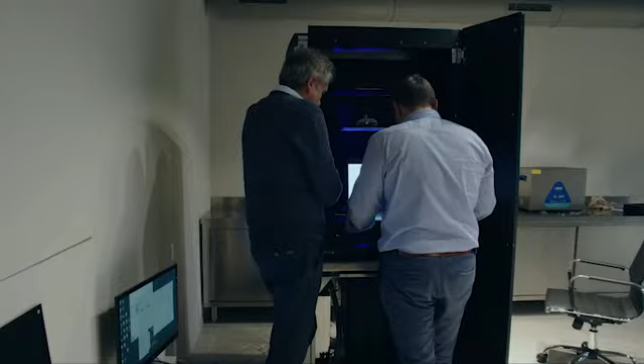It's about our company, Axtra3D, and our breakthrough technologies and products that are set to revolutionize 3D printing. A few highlights: Axtra3D has a portfolio of 9 key patents and growing. We are a cohesive team of proven AM industry experts who have been working together for the past several years, boasting a combined 50 years of AM industry experience. Axtra3D operates from 2 strategic locations, USA and Italy, with headquarters in USA.

While our predecessors made several exponential technology leaps addressing some of the drawbacks of photopolymer 3D printing, the trade-offs between part quality, resolution, print speed, scalability, and accuracy still remain. These trade-offs meant when you optimized some, you had to give up on the others. For the first time, our technologies, highlighted by our hybrid photosynthesis, eliminate the need for trade-offs and optimize all the key competencies independently and simultaneously. As a result, Axtra3D is poised to make a giant leap that will enable far wider adoption of photopolymer-based additive manufacturing.

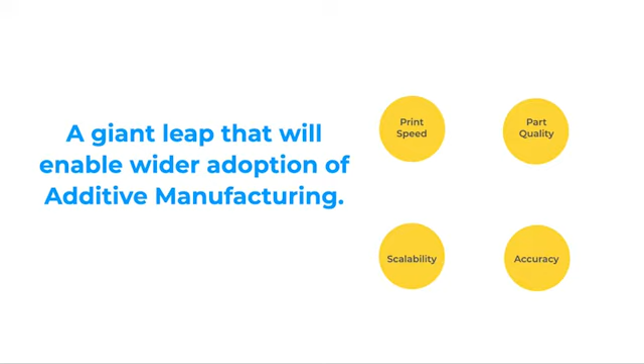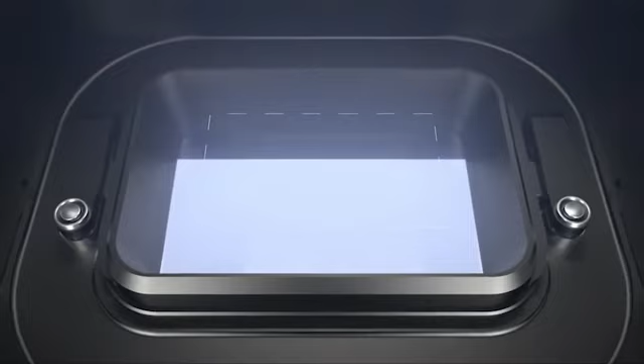Our HPS is a hybrid light engine solution that offers the combined advantages of 2 light engines, DLP and laser. HPS brilliantly brings together the energy from the 2 light sources and creates a harmonized light engine that unifies every value: wavelength, power, curing time, and simultaneous operation.

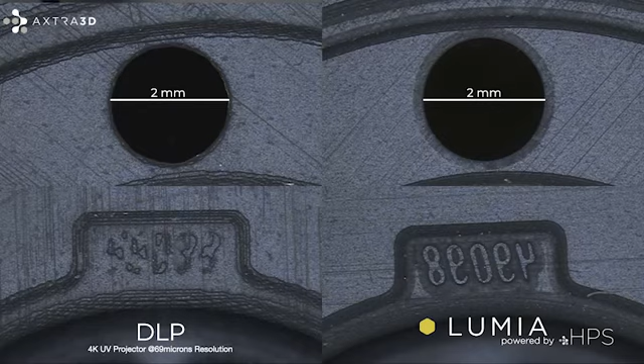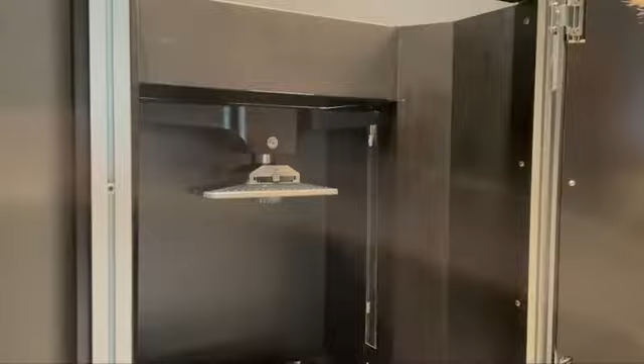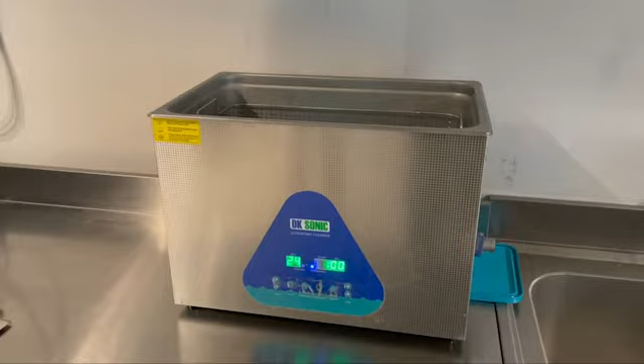HPS enables ultra-speed 3D printing at scale while delivering up to 3 times the resolution, Class A surface finish, high precision, and accuracy. Some of our customers spend 30% of their time and resources on smoothening the surfaces of AM parts. As you can see in this video, our HPS technology offers Class A injection molding-like surface finish straight out of the printer. As a result, it eliminates the need for surface finishing processes, which typically are not environment friendly.

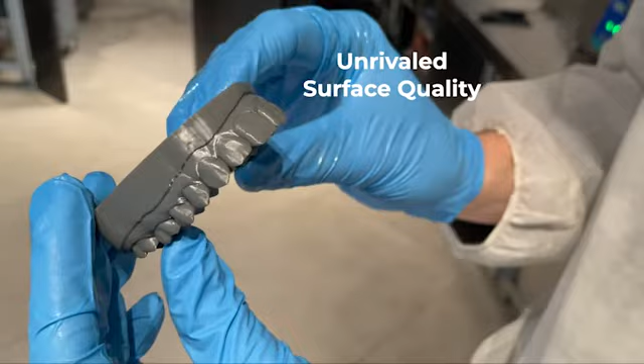What about a marketable product that offers our revolutionary HPS technology? It is already here. Axtra 3D's first product is an industrial 3D printer named Lumia. It offers resolution that is 2 times higher than standard DLP printers while matching the print speed of the fastest photopolymer printers and offering a larger print area. Lumia also delivers high accuracy and Class A surface quality.

But wait, there is more to Lumia. Lumia encompasses other breakthrough technologies from Axtra 3D like zero suction effect during the peeling process, non-degenerative vat membrane, and unlimited cross-section printing capability. Now let's talk about print materials.

All the standard DLP market materials can be printed using Lumia, so there is no need to develop custom materials. Lumia's revolutionary technologies also enable printing of high-performance materials like ultra-high viscosity resins and graphene nanocomposites.

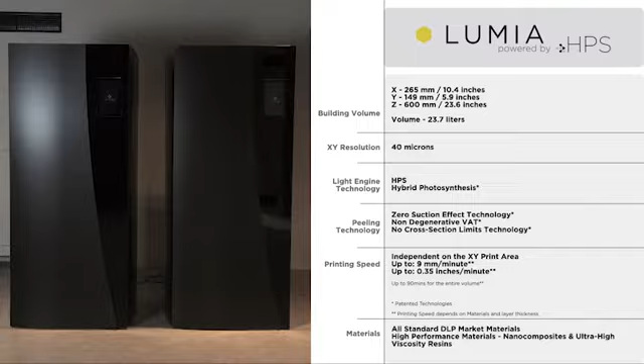We strongly believe in customer validation of any technologies we develop, so we have involved select customers from the very beginning. Our goal was to understand their needs and how the product should be developed to meet their needs, taking into account capabilities, competencies, and user experiences. Our select customers come from various industry verticals, including dental, automotive, aerospace, consumer goods, industrial equipment, pharmaceutical and analytical equipment.

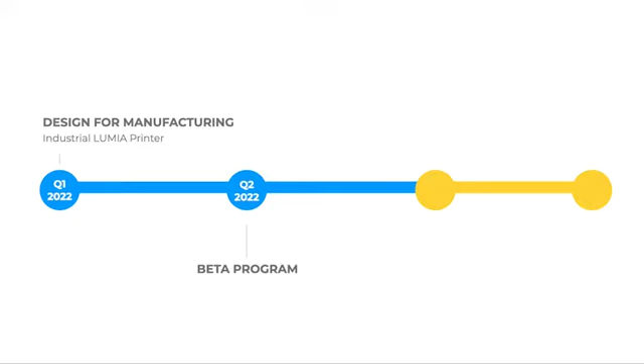We have set all the critical dates. At present, we are closing our design for manufacturing phase. Our comprehensive beta program covering various industry verticals will launch in June 2022, and we will begin taking pre-orders in October 2022. The full commercial launch of Lumia is scheduled for Q1 of 2023.

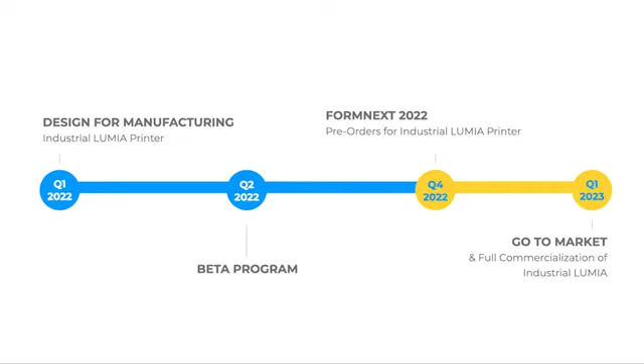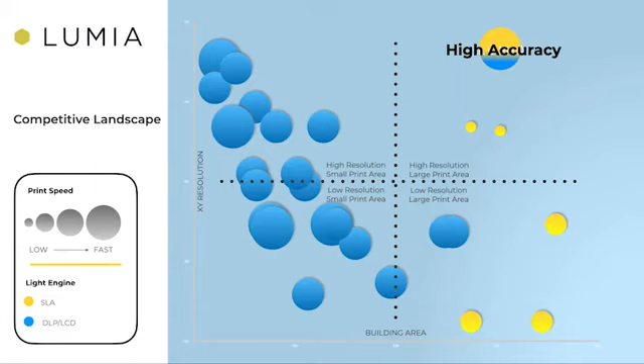So a couple of questions that came to mind. You started the company in the midst of the pandemic. Given your background in the industry for over a decade, what inspired you to come up with Axtra 3D? And building on that, what were some of the opportunities or obstacles you came across, given that you started this in January of 2021?

Thanks Saliq, and thanks everyone for attending. To answer your question, a lot of our predecessors in the DLP and SLA photopolymer industry have addressed a different problem. No one has taken a serious look at the light engine, which seems to be a drawback. With DLP, customers typically achieve speed much faster than SLA. With SLA, we get the part quality and accuracy, which is a problem with DLP. So no one has seriously looked at the two light engines and said, okay, we have these two choices, but there isn't a third choice that offers the best of both.

That's the idea that came to mind in 2020, which evolved into a patent filed in 2020, and in January 2021 led to the launch of Axtra 3D. A lot of difficult work went into bringing this idea to life, because it's never an easy task to combine two light sources. Just combining two lasers is a magnanimous task, and here we're combining a DLP and a laser.

Terrific, Saliq. Thank you, and thanks everyone for participating today. I'm going to go on screen with just a couple of pages here. By way of background, Fast Radius is a cloud manufacturing company. We are building a new type of infrastructure to help companies design, make, and move physical products in the digital world. Our product and platform is the first of its kind cloud manufacturing platform. I'm excited to tell you about that and what we do at Fast Radius, and I look forward to the discussion, Saliq, with you.

The way to think about Fast Radius is we are a software company and we make industrial grade parts. Let's take each of these two in turn. We think of ourselves as a software company. We are powered by software in everything we do in our factories, our supply chain, and in the customer experience. We are building a suite of tools to support our customers across the journey of designing, making, moving, and managing parts. Those tools include design for manufacturability tools, cost analytics tools, and software-driven insights at each stage of the journey.

We also provide a software-driven platform for ordering parts when companies need them made, not just in prototyping but through volume production. When we get into the supply chain side of things, we also have a suite of tools where we can help our customers manage their supply chains on an ongoing basis. An example is a virtual warehouse tool where we help companies like Airbus create a platform, a virtual warehouse, where they can order those parts and have them fulfilled at industrial grade standards when and where they need them. So when we think of cloud manufacturing and us as a software company, we're building out this platform of software-driven tools across the lifecycle of designing, making, moving, and managing parts.

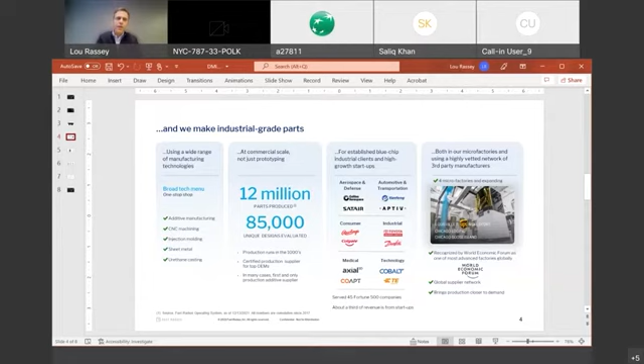When you think about cloud manufacturing, you can think of it in this tech stack, and we have built out this integrated tech stack, much like you have an integrated tech stack for cloud computing. That includes at the bottom the infrastructure of our factories and our supply chain, a learning engine and a digital thread where we can get smarter with every part that we make, a software-driven operating system to orchestrate the flow of work in our factories and our supply chain, then the software and services solutions that sit on top of that—this application ecosystem where we and third parties can build manufacturing services and software tools using the underlying data and infrastructure.

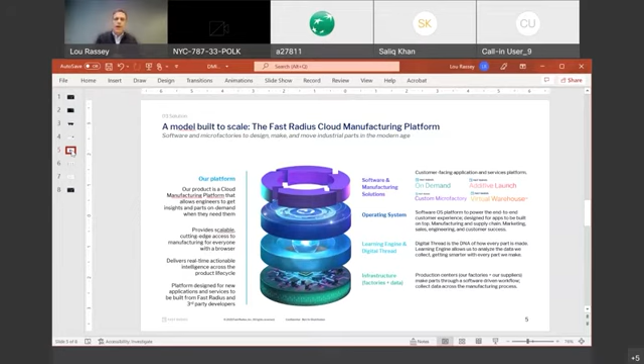As I mentioned before, we have served thousands of customers across just about every industry out there through the life cycle, making industrial grade parts, powering innovation in the physical world. We've been at this now for 5 years. We're excited to have recently entered the public markets through a de-SPAC transaction. We have a great partnership with UPS, including a micro factory on their campus in Louisville.

Our Net Promoter Score is something we're very proud of. The World Economic Forum recognition, I think, gives an indication of the technical sophistication of the cloud platform. But perhaps most importantly, it's the customers that have put their trust in us to make parts at volume for them and with them as they're bringing innovation into the physical world. But in a nutshell, Saliq, that's a little bit about Fast Radius and what we are building.

Excited for the discussion today. Thank you so much, Lou.

Really appreciate it. A couple of basic questions, and I know you and I have kind of talked about this before as well at length, but for the audience: what effectively transpired, or what inspired you—and your team, I should say—to come up with Fast Radius?

Yeah, I think it's rooted in the importance of manufacturing and appreciating the importance of manufacturing. This is an industry that really matters in the world. We say it's not just about the things we make, but the things that we make possible. It's not just about the cars, cell phones, satellites, but it's making the world more connected, making the world more healthy, feeding, empowering the world. This is such an important part of how the world works.

I'm a third-generation manufacturing guy. I grew up in Detroit. I've been around manufacturing since I was a kid, and I have a deep appreciation for the importance of this industry. At the same time, there's this massive wave of new tools, Industry 4.0 and the innovations around it. So I was at McKinsey for a long time, helped build what is now the Industry 4.0 practice, and saw this wave of innovations coming.

New tools of digital design and simulation, new tools in factory equipment and automation, material handling, new models for supply chains. And so it presents this incredible opportunity to create a new platform for how we can design, make, and move things. Given the significance and the importance of the industry, the size of the industry, the wave of innovations coming, it became very clear there was an opportunity to create a new type of platform.

And we've seen this in other times in the industrial revolutions and generations before. We've also seen it in cloud computing. If you look at the impact of cloud computing as a platform that others can build on, it's driven incredible innovation in the digital world. And we think bringing the digital world and the physical world together in cloud manufacturing creates that same type of market opportunity. So those were some of the forces as we thought of putting the company together.

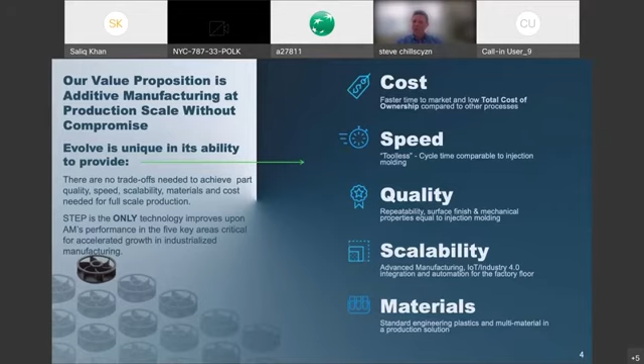And the value proposition that we offer is really about additive manufacturing at production scale. And the big kicker here is without compromise. So we talk a lot about costs and speeds and quality and scalability and materials, and how important that is for our manufacturing customers and application developers. And really the one element we talk about is they're not willing or able to compromise. So again, the STEP technology was created for that alone.

Now, the partnerships that we've put together - putting together a system like this in production is not simple, and it can't be done alone. So putting together the strategic partners that we have, whether it be Materialise or Kodak or Post-Process or Rockwell or B&R, was absolutely essential. Because while the STEP technology is critical to our overall process, one of the things that's very important, and probably more important, is the automation of that process. There was a discussion earlier about repeatability, software, production capability, and that's what automation gives you above and beyond the STEP technology.

Now, from an investment perspective, obviously being a younger company and capital equipment company, investors are critical. So we have investors like Lego, Stanley Black & Decker, and 3D Ventures, which we just closed a round with in the July timeframe. They're actually critical, not just from a capital perspective, but also from the understanding of the market - you get a company like Lego or a company like Stanley Black & Decker that are using plastics in the volume they're using it in a very automated way, and wanting to integrate our solutions into their factories, giving us that knowledge and know-how and that voice of customer that's so critical as you launch a company. So it's very exciting to have these groups, not just as customers, but as investors.

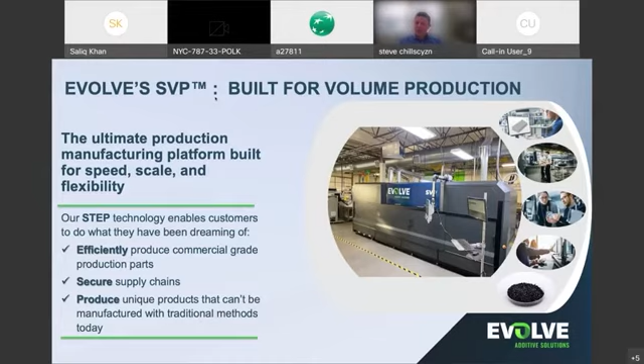And the SVP platform, as I said before, is really built for production from day one. As you can see in the picture here and all of the companion products, this is not a desktop machine by any means. It's built for your factory. The software is built for factory integration, and it's also built for speed and for productivity. So from the efficiency that you're going to get out of commercial grade production parts out of our system is in the materials - that, again, I said materials. And here's why it's so important.

I've said it a couple times, probably ad nauseum, but it's really important: materials. In order to get these applications developed, our customers in production aren't willing to bend and yield into similar or like materials. They don't want to hear it's ABS-like, they want to hear it's ABS, a SABIC ABS or one of the other manufacturers. Same with nylon, they don't want to hear it's this grade of nylon that no one uses. The automotive companies, we know what they want: PA6 with glass fill. So that's what we offer, a PA6 type of material.

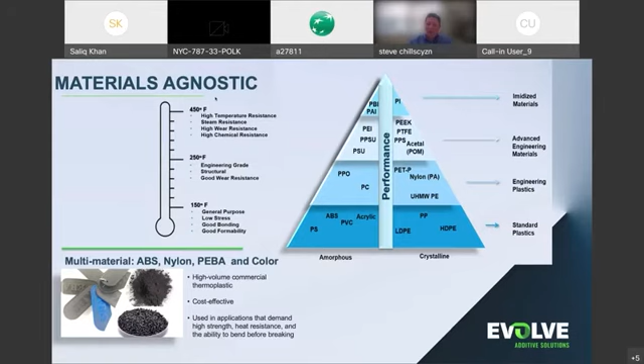Lots of different opportunities, because STEP technology and our SVP platform really offer two new distinctive technologies that allow for competitive quality levels. There are over 100 patents that define STEP technology today, but two really distinctive, groundbreaking technologies go along with it that allow us to fulfill our customers' applications on the quality side, but also on the productivity side.

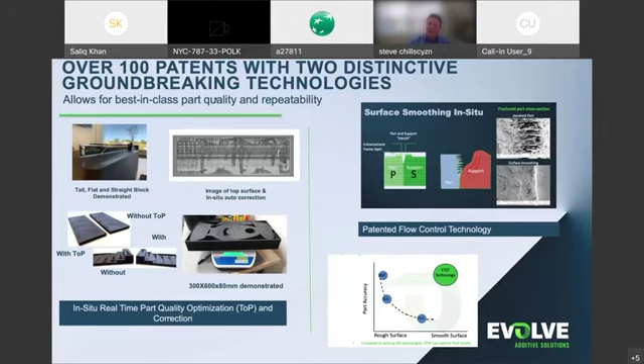The other technology, on the right, is a smoothing technology, again giving us that injection molding grade quality of our parts. You can see from this picture some examples of different geometries we can make, but really the quality level we're getting rivals that of injection molding. That was one of our main goals as we started the company.

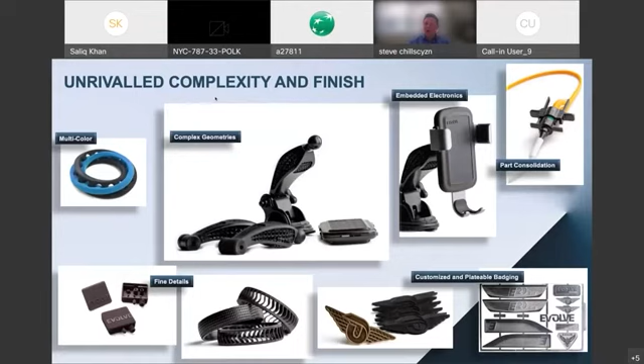Really, our market, from a financial perspective, our company and our product are all about augmenting that injection molding application, technology, and business, and we all know it's about a $300 billion worldwide business. So what we're looking to do is grow that, actually take some market share, but it's really about growth.

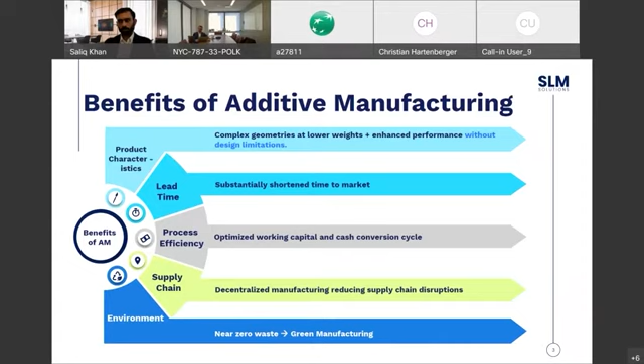It's a rapidly growing market. I like all the statements from the people before me. Think about it: as this technology develops, we're currently impacting only a very small amount of the traditional manufacturing market. What we're doing with driving this technology and its productivity is not just accessing the significant growth already expected, but hopefully opening up more of the traditional manufacturing market by bringing technology that has cost parity, or even cost benefits, over traditional manufacturing processes, while also adding all the other benefits I mentioned on the previous slide.

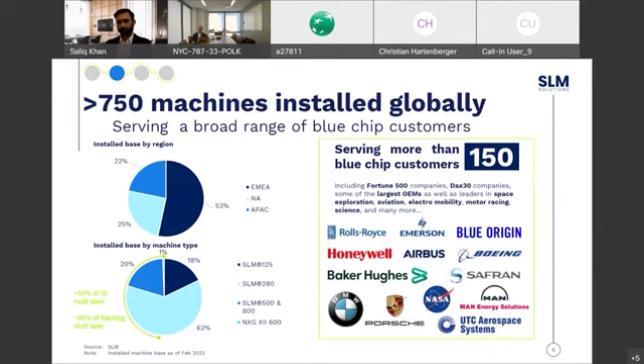We already have a very huge and impressive install base of more than 750 machines. But what's more important than the number is specifically where those machines are at, across all industries, the very companies that will drive mass adoption of this technology across civil aviation, defense, space, energy, automotive, medical, and other applications. These are the driving force, and these are people we've been involved with over many years, enhancing the technology and delivering production applications for our existing fleet.

I mentioned our history of being a technology pioneer within this industry. We had the first system to market. We were first with a dual laser system, first with a quad laser system, and the product we just launched a year ago is a 12 laser system.

Now, these are not just numbers in terms of how many lasers sit within the system. They are exactly the driver around system productivity. And what that gives you is huge benefits in output cost per part, which is the fundamental enabler to mass adoption. Nobody will ever argue that this technology delivers performance enhancement in terms of geometrical design freedom or inventory advantage. The missing piece of the jigsaw has always been cost parity with traditional manufacturing methodologies, and this is a huge step towards that.

A little bit more detail on the next slide about just what it is. It is purely a game changer. It's bigger than anything else, and it's light years ahead of anything else in terms of productivity.

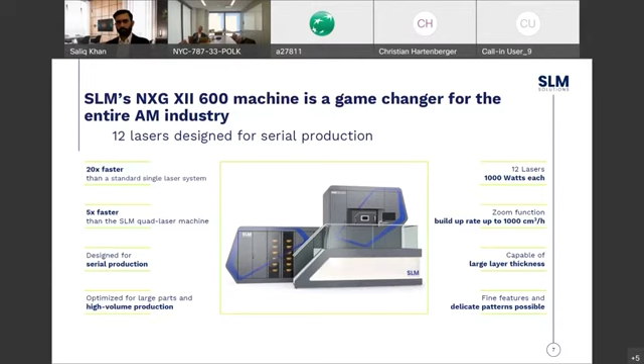On top of that, if you compare this to the majority of the single laser install base currently operating for production applications with this technology, it's 20 times faster. So if there was a business case existing for complex components using a machine with one laser that takes a long time to produce components, just think about the impact of 20 times the speed, along with a significant cost reduction in the output per component.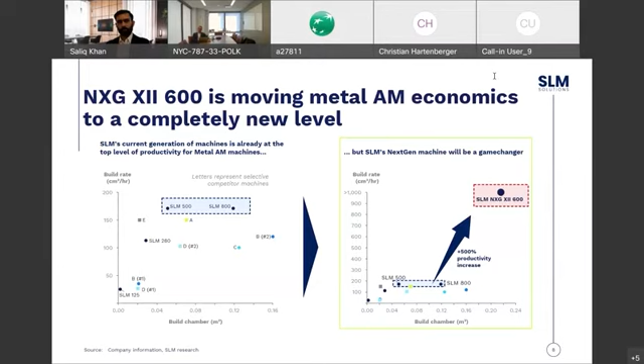We're also enabling customers to do more with enhanced software solutions. Free Float is a product we launched last year. At its fundamental base, it's designed to reduce the cost per part for our customers and enable more application. This is something we give for free to customers operating our install base, because it drives more application, drives end cost per output down, and of course drives further demand by enabling new application cases.

Next, a little comparison about what it actually means. Everything we do as a business is focused around enabling our customers to do more and driving the industrialization of this technology. That means everything is focused around open architecture. Our customers are the world's biggest organizations, the very people who've been using this technology for a great deal of time. They've developed know-how, and for us, giving them the capability to utilize that know-how, take a base of the technology we deliver, but fundamentally manipulate it to develop an extra competitive advantage in that industry, is something they consider of great value, and is fundamental to how we think about running our business.

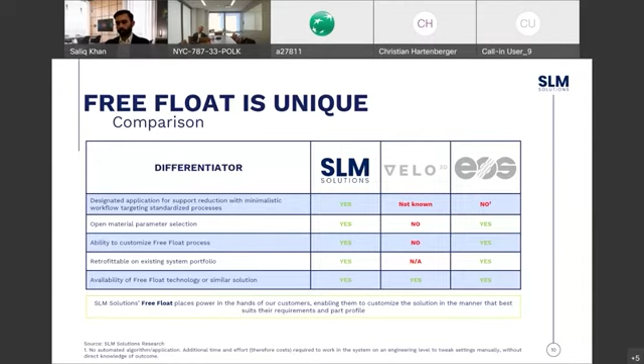If you give a customer a black box solution that just says parameters are fixed, this will give you a good output but there's no way you can change that, this creates a 'Me Too' situation where everybody outputs the same, gives no competitive advantage, and fundamentally inhibits progression and inhibits innovation.

So on the next slide, I've got a great example of how this performance enhancement manifests itself in real life. This is an NXG machine-enabled application for Porsche. It's enabling their EV technology.

In its simplest form, it delivers a component that is reduced vastly in terms of weight. It combines multiple components into a single build, a single print. It improves the rigidity of the component by over 100%, and also removed 40 manufacturing process steps. If you think about that in terms of cost, simplicity of process, and the ability for any factory to produce and deliver this, it is a huge impact.

And this is just one example of the thousands of things we see day to day where this technology impacts everything from electric vehicles to rocket engines and everything in between, delivering the capability to make complex parts very quickly, very effectively, and deliver all the advantages that I mentioned earlier.

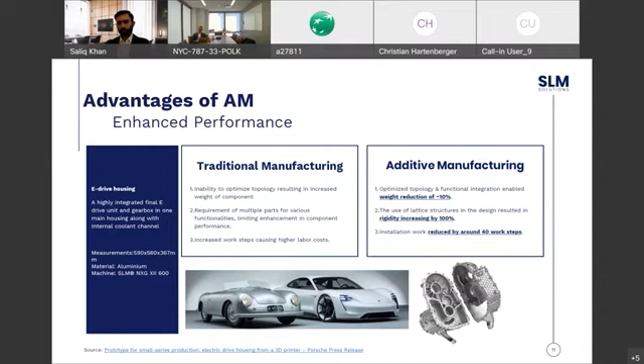Moving on to the next slide, we are a business that is delivering 2 consecutive years of meeting our guidance, 2 consecutive years of growth in excess of 20%. We've already given guidance for this year of at least 33% growth, and 2026 expected revenue levels of at least 5x what we delivered in 2021.

Alongside that, we have a clear path to break even on a quarterly basis in the second half of this year, and really continue to push forward with the strength of our existing portfolio, with the impact that the NXG is already having in the market. In fact, we just released information today on one of the prominent service bureaus in the industry ordering 2 of these machines, to be delivered starting later this year.

And finally, the last slide I've got here is just to show that we're set up for growth with everything in place. We've been building the infrastructure, the people, everything we need to deliver on this growth. So we have high operating leverage. The introduction of the NXG and the continued growth across our portfolio will result in a significant EBITDA improvement as we progress through the following months, and of course as our revenue continues to grow through the following reporting periods too.

So with that, I hope I've given you a bit of background about who we are and, more importantly, the direction that we are taking, and I would be very happy to open it up for further questions.

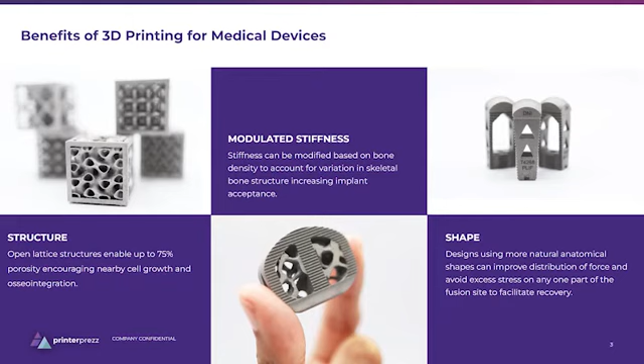The industry is ready for disruption for the following reasons: AM as a technology has matured significantly and can be used to build regulated parts in volume. Global demographics are driving heavy demand for devices. The healthcare ecosystem is getting more cost sensitive, but medical devices continue to be very expensive. Current medical device manufacturers are not ready for the new reality.

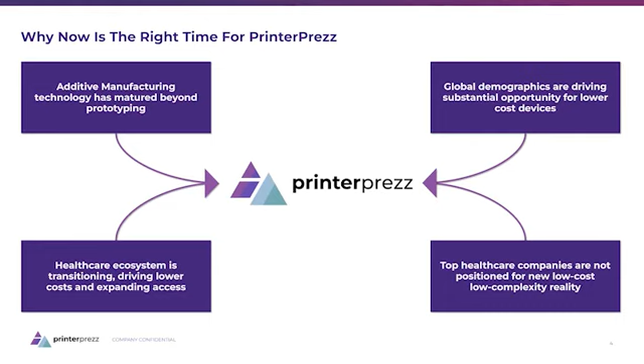PrinterPrezz's proprietary digital backbone can help disrupt cost and performance of premium medical devices, leveraging proven technologies and infrastructure.

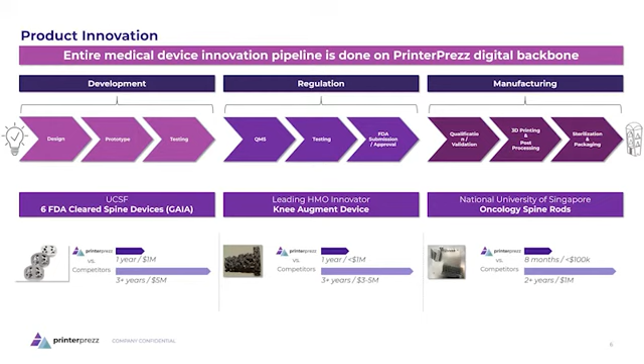Our global footprint includes a large innovation center in California, a mass manufacturing facility in Ohio, and medical device and bacterial testing centers in New Jersey and Boston. We are also looking at replicating our innovation and micro-manufacturing centers across the globe.

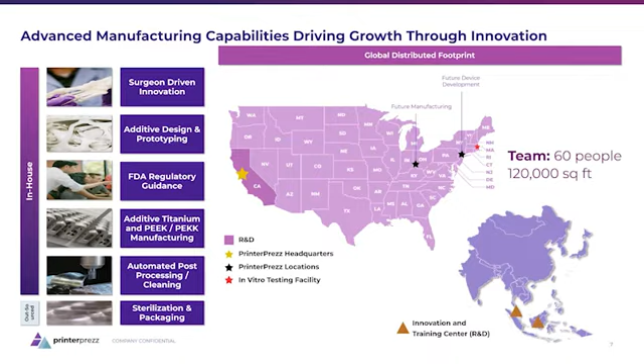In the US market, Digital Foundry enables PrinterPrezz to realize higher margins on premium devices. In the Asian market, Digital Foundry enables PrinterPrezz to realize higher margins on premium devices that have been tailored for the local population.

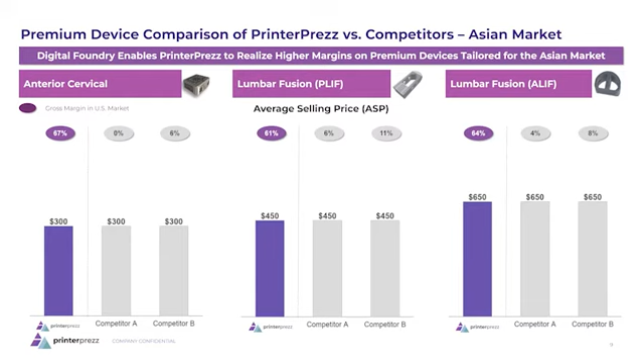The future is engineered materials for medical devices. PrinterPrezz has partnered with Solvay in taking their proprietary materials and significantly increasing their strength. We plan on submitting a line of devices on this proprietary polymeric material to the FDA soon.

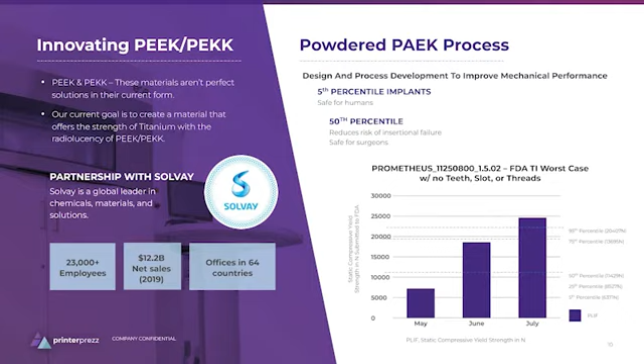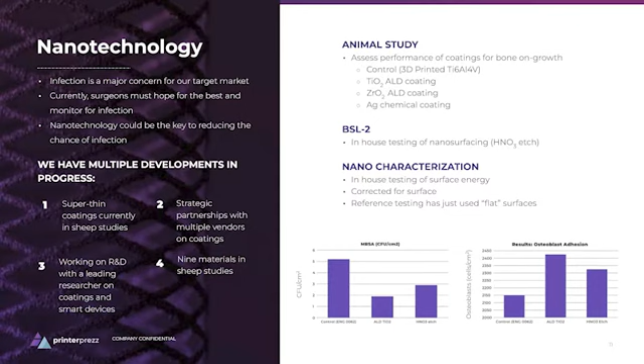We have a strong cross-functional team across various industry verticals. This includes doctors, medical device specialists, and advanced manufacturing experts.

PrinterPrezz closed a $16 million Series A round in 2020 and is currently in the process of raising a $70 million Series B round. This round will be used to expand manufacturing, our product portfolio, and R&D.

We have a strong consortium of financial VCs on the left-hand side and strategic VCs on the right-hand side, and are looking for others to join the round.

Here is a summary of everything that was discussed in the last few slides.

Thank you, Shri. Really appreciate it. I know the amount of time that we have today is not sufficient to really thoroughly discuss the inner workings of the company and things of that nature. But a couple of questions.

As you think about what PrinterPrezz is doing, effectively marrying the best of both worlds across medical science and advanced manufacturing, talk a little bit more about that. Going back to day number one, 4.5 years ago, what did you see in the marketplace that said to you, look, there's a need that needs to be addressed, and let me think about how I can do that, and that's how PrinterPrezz came about? Can you just talk about that day 4 years ago?

Thanks, everyone. Thanks for the introduction, Saliq. My talk today is going to be about Uniformity Labs, pioneering material technology, enabling digital manufacturing with optimal resource efficiency. A bit of a mouthful, but I'll be able to explain it.

First, 2 seconds about Uniformity Labs. I'll talk more about us later, but we're a materials provider in the AM space and in the broader manufacturing community. We provide advanced powders that span multiple printers, multiple print processing capabilities, as well as other technologies like metal injection molding and press and sinter. How do you process materials for cost effectiveness and for reliability?

We focus on enabling production additive manufacturing at production scales, both from a cost perspective and from a reliability perspective. With respect to global manufacturing, I'll say more about additive later.

We all know there are upheavals in global manufacturing today, supply chains and the like. There are certain mega trends that have emerged to which additive manufacturing is generally aligned: lightweighting, critical resource efficiency, using less material, powder instead of machining which puts a lot of chip on the floor. Distributed manufacturing is obvious. Novel materials are possible in AM but have a way to go. And onshoring, to name a few.

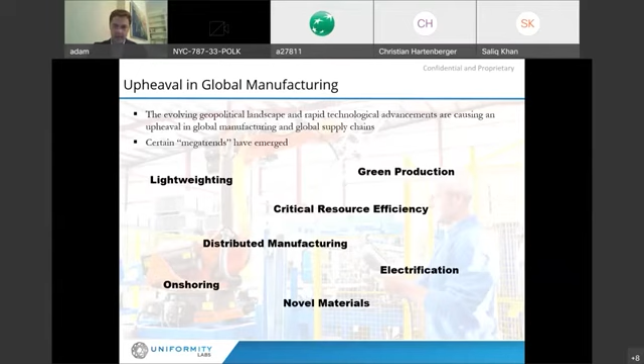Where additive is weak in each of these areas, I'm going to highlight here. So although additive manufacturing is aligned, it's an important trend to enable digital manufacturing in general, there are some problems. In lightweighting, distributed manufacturing, electrification, printing is just a little bit on the slow side, or old printing, and it's expensive, so it's costly to be broadly deployed.

There are ways around that, as Shri was talking about a bit ago, but there are others like Uniformity who are working on those ways.

Onshoring — again, AM is aligned, but scale is hindered. It's expensive to manufacture in large factories in the US. You can't have distributed manufacturing in this hemisphere but have a lot of footprint if your machines don't produce that many parts relative to their scale. If you have a machine about the size of a car or a van, and it's only producing a few tons of finished parts per year, you need quite a number of machines to go to scale manufacturing, to go to hundreds of tons of output.

And again, that's expensive. Green production: AM replaces machining when it does, and there's certainly less chip on floor. In the aerospace industry, AM's been adopted more broadly for these reasons, for small scale parts or small scale production. But compared to, say, casting, AM requires roughly twice the material.

The reason for this is the inefficiencies in powder production. When you produce powder in virtually any method — grinding, usually atomization for AM, higher quality metal — you only use maybe 40% or 50% of the particle sizes, and the other particle sizes have to go into different processes or be scrapped, and they're not premium. For materials like titaniums, aluminums, or tungstens that are critical resources, particularly those refractory metals, this is a problem, and it's a problem for cost as well, naturally.

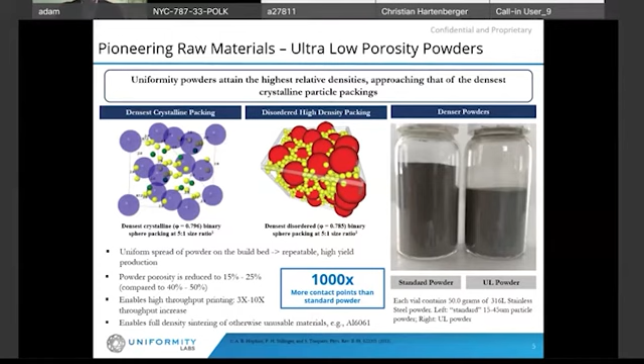With uniformity, ultra-dense powder that layers uniformly and absorbs laser energy better, we can increase print speeds dramatically in laser powder bed fusion, typically about 3 to 10x once all the benefits of our powder are deployed, and that's with comparable or better mechanical properties than you would achieve otherwise.

So you're turning one printer into 3 into 10. That's a vast improvement in customer ROI, and with respect to onshoring, it's a vast reduction in your factory size.

You also get much better material properties out the back door. You're not getting 98% dense material, you're getting 99.5. You can reach the quality, reliability, and mechanical properties that are achieved in casting, or even more so in machining in certain materials.

This is an even bigger deal for materials you can't re-atomize once they've been powderized, specifically like titaniums and tungstens. It works for aluminums as well. So this makes Uniformity quite a bit greener. It takes an enormous amount of energy, in addition to being resource efficient, to smelt aluminum or to run the Kroll process on titanium. We roughly halve that energy and use all that powder, applying it directly to the premium field of AM.

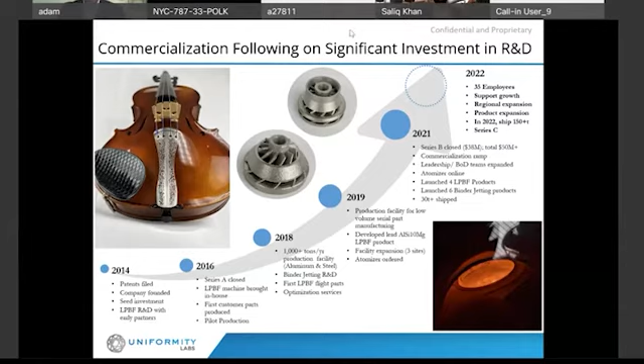Yeah, so addressing the later question, we don't do it all, right? We don't make a printer, for example, and we're not specific application focused. We have partners who are, who know what they're doing, and that's important to us. So what we focus on is making sure we serve those channels in this limited framework. It's limited, but it's the most important one in our mind. And providing the material suitably with a supply chain that's bulletproof. We can use different powders from different suppliers, we don't have to use our own.

And this is actually fantastic. If we have problems geopolitically, for example, with one material, we can move to a different supplier. There are many that work the same way. And we can provide this type of benefit specific to this powder need and to this processing. Does that answer the question?

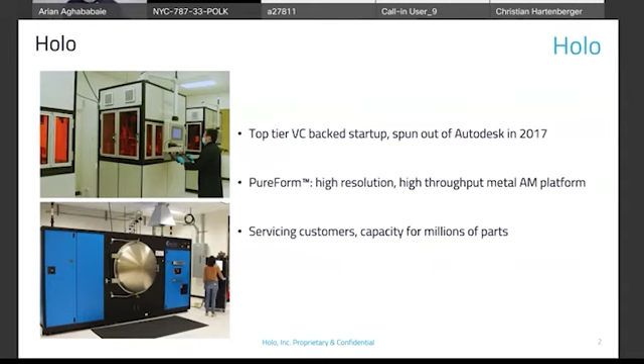Before I dive into the technology itself, I want to offer a point of view. I think we're all here today in the additive industry because we believe additive manufacturing has the potential to enable a world designed and built without constraints. But it's also true that we exist within a paradigm where the equipment is still expensive, requires deep process knowledge to operate, and parts generally require secondary operations, which is where the vast majority of cost lies. In summary, these parts are not production ready. For widespread adoption, AM needs to match the quality and cost structure of traditional manufacturing, whilst also enabling the design freedom of additive manufacturing. That is what Holo was founded to do.

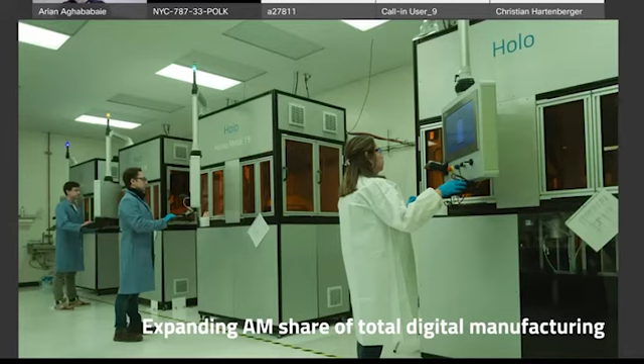Let me show you how we do that. It starts with our PureForm process. The way to look at the screen is in two halves. On the front end, we have our proprietary platform, based on bound metal lithographic printing. On the back end, we're using standard metal injection molding sintering technology. If you're not familiar with MIM, just look at your iPhone - 7 components within it are made using MIM. It's a technology capable of producing billions of parts a year.

On the left-hand side of the screen, two key aspects: first, we've engineered our own liquid photopolymer resin, which acts as a platform that allows us to print practically any material that can be powderized and sintered. We print those in printers of our own design.

These are projector-based systems, orders of magnitude lower cost than prevailing metal additive printers out there. Perhaps more importantly, we're able to leverage projectors to produce multiple parts, anything from 1 to hundreds simultaneously in a build, by exposing 2 million pixels at once, achieving very high resolution parts at very high throughputs. We're currently working on our next-gen system, which will have the capability of producing up to 3,000 cubic centimeters an hour.

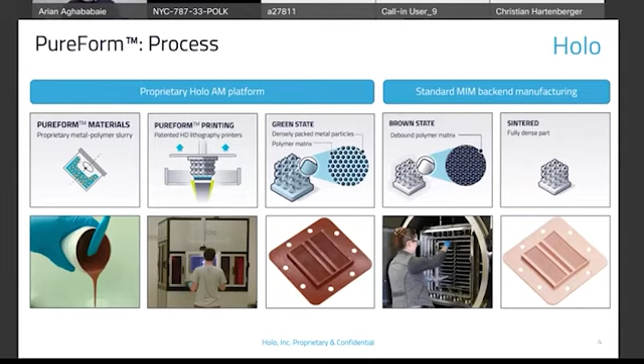The result is this high fidelity green part you can see in the middle, which then goes on to be debound and sintered in a traditional metal injection molding fashion.

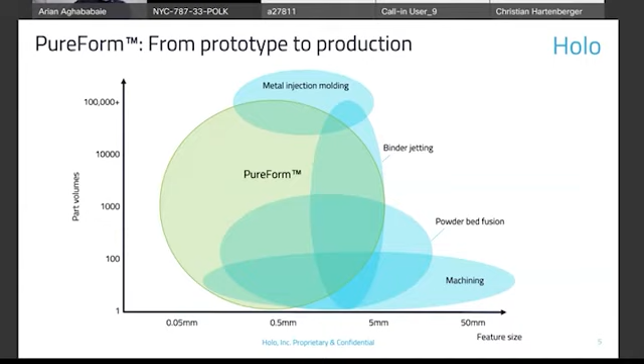The net result of our capabilities is shown on this graphic. On the x-axis is feature size capabilities, and on the y-axis, part volume capabilities. PureForm is able to traverse a very wide spread of high-resolution parts, all the way from prototype volumes, 1s and 2s, up to hundreds of thousands of components a year, rivaling entry-level metal injection molding volumes. Not only that, we also have a very wide spectrum of materials that we're able to produce.

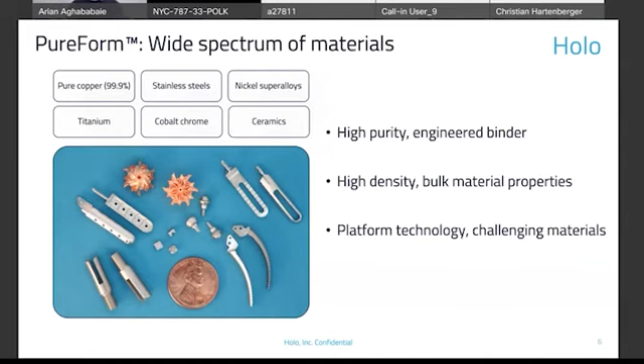That's based largely on the fact that we have a highly engineered binder system. This is core to our IP as a company, allowing us to produce parts that maintain the bulk properties of the metals or materials we're printing with. It's a platform technology that allows us to produce a wide range of materials, from pure copper, where we started as a company - a very hard material to produce in additive - all the way through to alloys such as stainless steel, nickel superalloys, and even ceramics on the same printing platform.

The net result of all of that are parts which are very high fidelity, high resolution with fine features and high accuracy, holding tolerances on the order of plus or minus 25 microns, but also very low surface roughness and high quality parts that do not require any secondary operations.

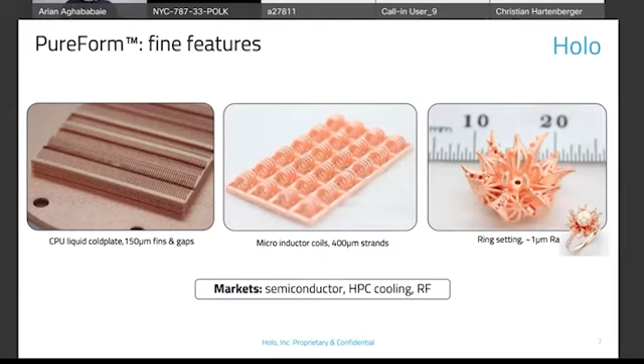The parts you see on the screen are examples of ones we've been servicing for customers in the semiconductor industry, HPC cooling, as well as RF, where we're not only producing traditional geometries but imbuing performance with the design freedom additive offers, such as that cooling plate on the left-hand side of the screen. Also in medical, dental, industrial, and scientific equipment industries, we're able to produce parts that come straight out of the furnace with features such as functional threads down to M1.4, a 200 micron pitch, surface roughness on the order of 1 micron RA, and 50 micron sharp features for biopsy forceps.

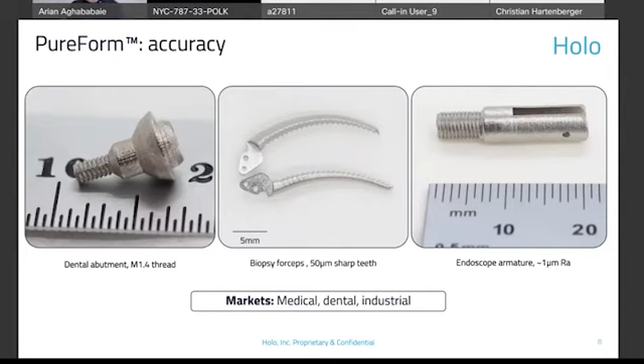In summary, as I mentioned at the top, our point of view as a company is that we must be able to maintain or at least match the quality of traditional manufacturing and the cost structure of traditional manufacturing, in order to attract a wide range of customers. But we also need to offer up the design freedom that additive manufacturing offers. We've done that by maintaining the bulk properties of the materials we print with. We are producing parts with unrivaled resolution and surface finish without the need for secondary operations, which allows us to hit the cost structures required and produce at the throughput needed to achieve volume production with additive manufacturing. And to tie it all back to my founding vision of the company: to lower the barriers of adoption for additive manufacturing.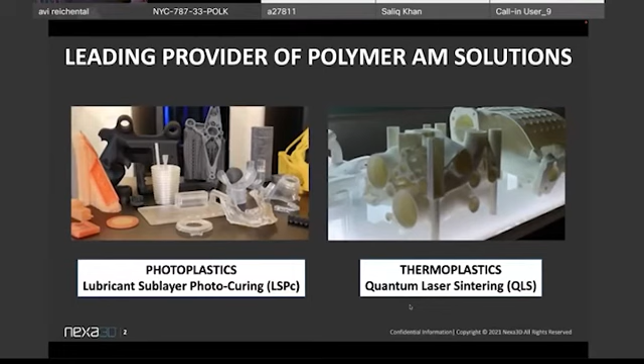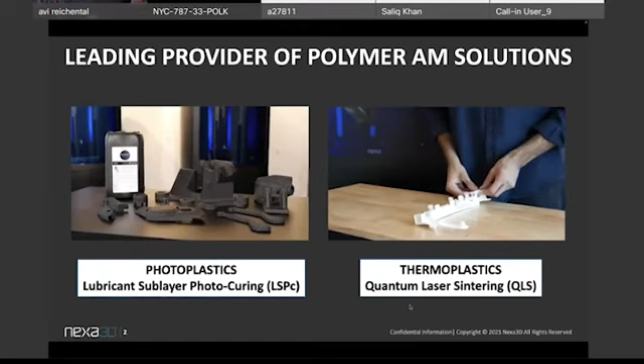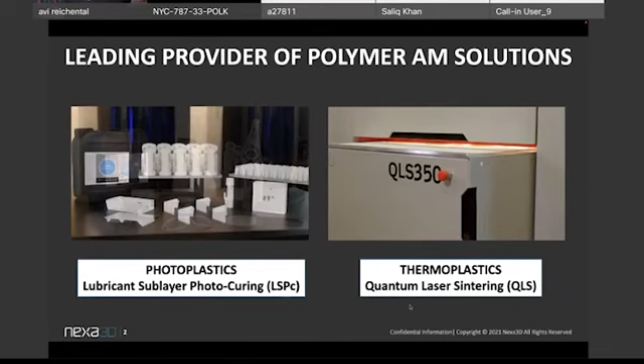We fundamentally have two technologies. We have a photoplastics technology that is LCD light engine based and can print material at a rate of about 8 liters per hour, which is pretty high. And we have a powder bed thermoplastic technology that also can convert and sinter polyamide powders and higher temperature powders at about the same rate. So fundamental to our value proposition is up to about 20x productivity at much larger build volumes.

And the good news is we enjoy quite a bit of traction already across the markets we're targeting, the usual markets you might expect from a company of our profile. We managed to attract and assemble a group of seasoned industry veterans and innovators, including a great board of directors that goes well beyond just representation of our VCs. And we not only more than doubled revenue year over year the last few years, we also managed to continue to double our team and attract some really awesome talent, even during the Great Resignation.

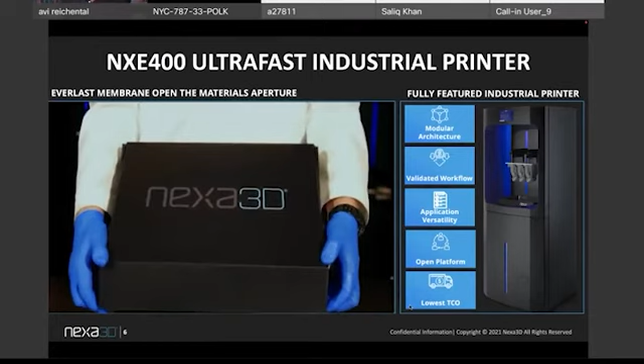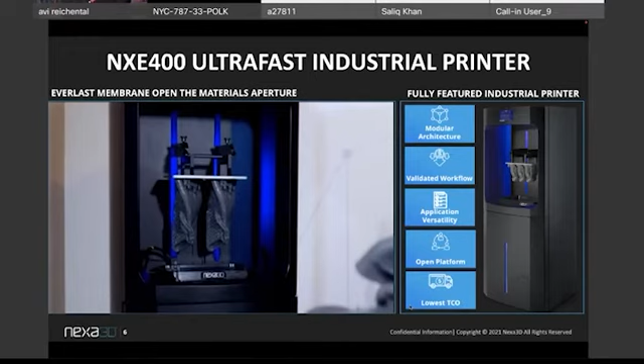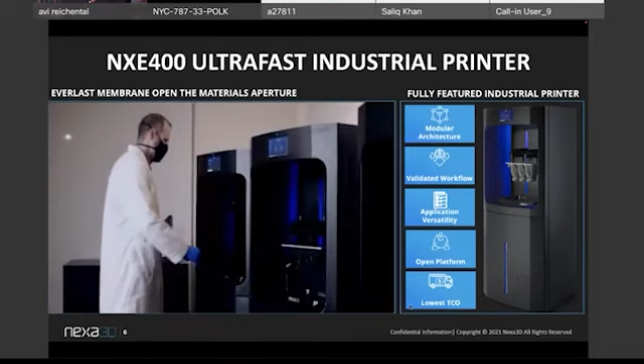We have a few commercial printers on the market. These are fully featured printers that can print literally in minutes and hours what would otherwise take days and sometimes nearly a week in terms of displacement, with very good accuracy, aspect ratio, and overall mechanical performance at a size and speed that is highly differentiated and valued in the marketplace. That was the industrial printer.

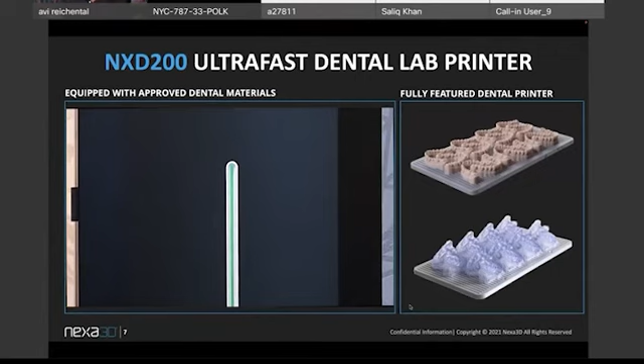We have a similar offering in the dental space that primarily addresses aligner manufacturers and large dental labs. And we have a significant total cost of ownership advantage that starts at about 650%, simply because to match the output of one of our printers, you would need a multitude of, let's say, the best in breed comparables on the market.

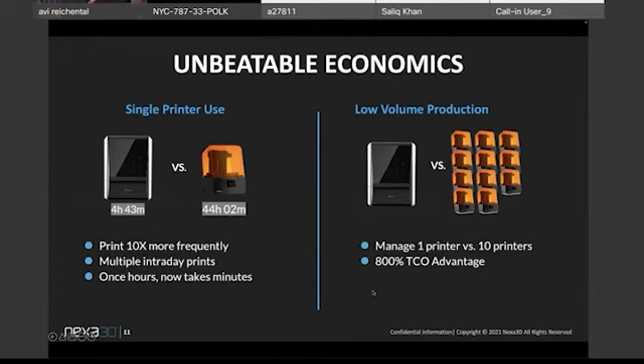We think that that's another very large addressable market. And here again, we believe that we have a significant productivity and total cost of ownership advantage by virtue of our unique light engine technology.

We are a polymer pure play additive manufacturing company. We only do polymers. We think that in the manufacturing space, with our speeds and unit costs, we have a shot at going after volume manufacturing. And within that, we target basically the usual verticals that you might expect.

We have customer successes in 5 continents and with hundreds of successful installations. We have a global footprint. There isn't a week that goes by that Nexa is not represented or featured through channel partners or ourselves around the world. And we're pretty excited about our growth.

This is a high growth and earnings model, which is comprised of hardware, consumable, and software subscriptions, which we expect over the next few years to equal about 50% of revenue from recurring and over 50% of gross profit margin.

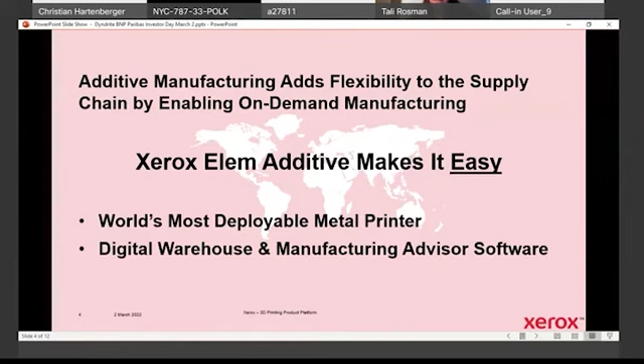ElemX, the liquid metal printer we launched last year, is the first time that making production grade metal parts has been made easy, without powders, without toxic risk, without hazardous materials, without shrinkage and warpage and accounting for those, without complex post-processing. We took all the friction off the table to allow customers to get everything that's great about metal additive manufacturing without everything that's challenging about it.

That's not all we're doing. We're Xerox, we're a big company. So we launched a liquid metal printer last year. We're launching now the digital manufacturing software platform, and we have a lot more to come. Xerox has a very extensive IP portfolio that's going to ensure our continued growth and investment.

This is a very exciting time to be in the additive manufacturing industry. I think everybody's feeling the hype returning and the growth and the interest from customers. I think the bigger the pain point, the more appetite customers have to try new technologies like additive manufacturing. And the pain point around getting parts has been so significant in the last 2 years that even companies that have been very much on the fence on adopting additive manufacturing, you're seeing that shift.

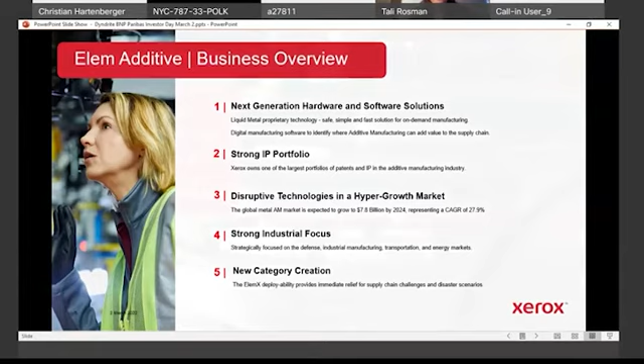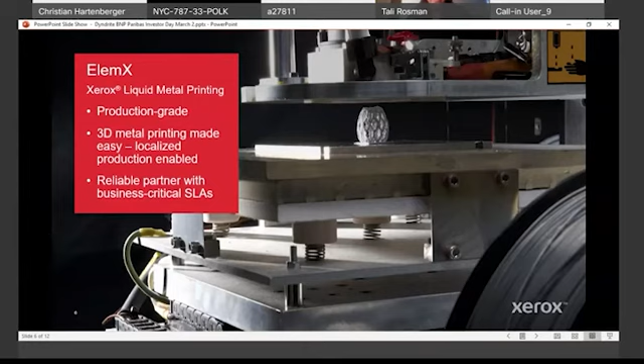So ElemX, production grade metal printing, we use wire instead of powder, which enables us to make it extremely easy to deploy with very minimal facility requirements, very easy to get trained on, very easy to maintain and use.

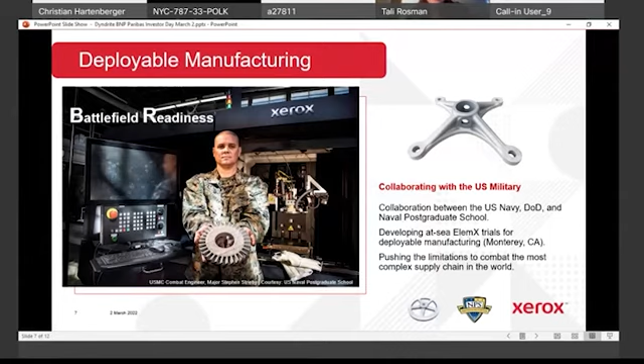When I say easy and deployable, just to give you the extreme scenario of this, we've been working with the U.S. Navy via the Naval Postgraduate School on helping the Navy with their vision of the floating factory. So really taking the microfactory to the extreme by having 3D printers on ships, making parts on demand in the middle of the ocean. So far we have a printer on land with the Naval Postgraduate School, but now we're gearing up later this year to put a printer on a ship and live up to this vision. And certainly if we can do it at sea, we can do it at land and enable true agility into the supply chain.

We're now taking this one step further. We're launching our digital manufacturing software platform. This is, first of all, completely technology agnostic, not just for ElemX. It has all the different printers and technologies, powder bed fusion, binder jet, SLS, SLA, everything that's common in this industry. Essentially it has two parts, the repository, which is kind of the digital warehousing, if you will, and the advisor, which tells you, can I print it?

Should I print it? So in the repository, it's like a OneDrive, but for all your parts files. We also have the option to help you populate it. If you only have drawings, we can convert them, et cetera. There's different levels of collaboration there, parts that only you can see, parts that everybody can see, and a very intuitive UI for ease of use and for ease of collaboration.

For every part that you upload, we'll tell you two things. Can I print it? Should I print it? Can I print it - what is, just from a manufacturability perspective, parking costs aside for a second, what is the best way to make the part? Best material properties, that is. You can tinker with the scenarios, you can tinker with the material properties, and we look across the gamut of 3D printing technologies there are in the market to tell you what is the best way to make the part.

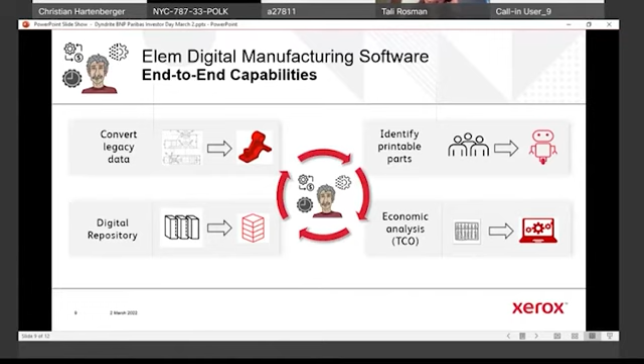This is extremely powerful because today one of the challenges, and we heard this theme throughout the day, is building the business case to move to additive manufacturing. Well, we've made it kind of an instantaneous business case to identify those sweet spots for additive manufacturing in your operation.

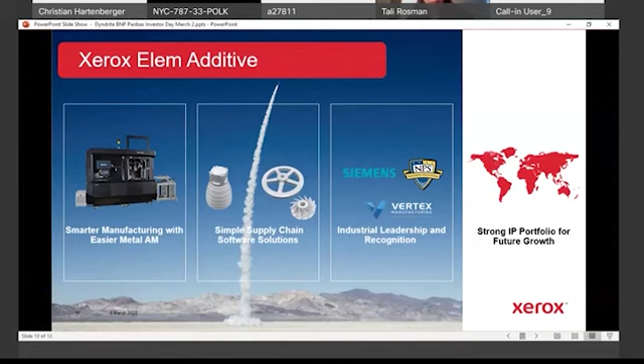So again, Xerox Elem Additive is all about enabling the supply chain resiliency with the easiest to use production grade metal printer and easy to use end-to-end workflow software. We already got customers, we're already selling, we're out there, and we have a very strong IP portfolio that positions us for future growth. We're headquartered in Cary, North Carolina.